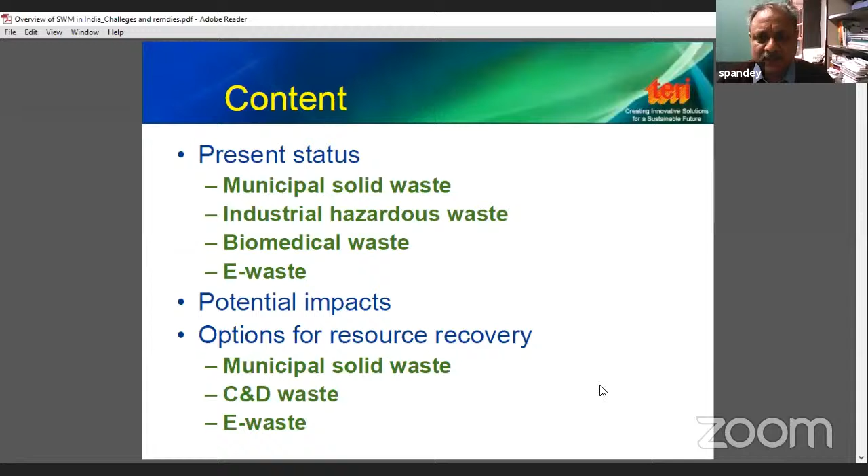If you look at the content, it briefly discusses municipal solid waste, industrial hazardous waste, biomedical waste, e-waste, one or two slides on the present status of generation, and potential impact if these waste types are not managed properly. Then some options for waste recovery and recycling, and towards the end, with reference to COVID, how waste has to be managed.

So, present status - a slide on generation in terms of waste quantities. Starting from municipal solid waste, almost every kind of waste is generated in terms of million tons per annum, except for biomedical waste, which is less, but not least important because of the type of hazard which biomedical waste, or waste generated from hospitals and healthcare facilities, possesses. Municipal solid waste is around 62 million tons per annum, as reported by regulatory agencies.

Construction and demolition waste - though regulatory agencies mention much lower generation, we estimate around 500 million tons per annum is generated. Construction and demolition waste mainly comprises construction activities like flyovers, roads, buildings, bridges, and also buildings broken up when they become old or are renovated, and roads and other infrastructure. So waste generated from that is called construction and demolition waste.

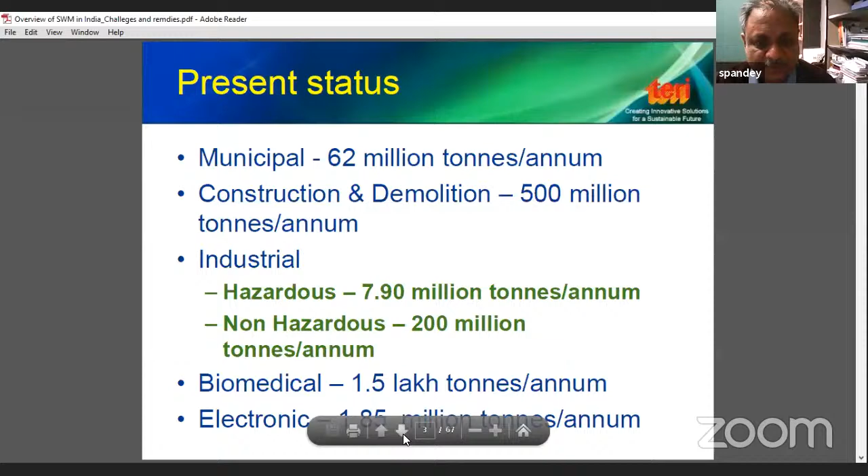Key issues - what are the key issues in terms of each of these waste streams? Why are we bothered about these waste streams? Municipal solid waste, as the name suggests, is generated from cities, municipal activities, households, institutional premises, and commercial premises which are there in the city.

What are the issues? We don't segregate waste still to the extent that we should be doing. Though, if you look at Swachh Bharat Sarvekshan, Swachh Bharat mission documents, around 50% of households are now segregating waste at the source, but still a lot more has to be done.

Inefficient collection efficiencies in most of the cities range from 50 to 90%. 90% is generally for larger cities, and 50% for smaller cities and medium towns. So that indicates that on a daily basis, not the entire waste generated is collected. Some waste remains uncollected on the streets, on the roads, and that creates a problem. It not only attracts stray animals, but also is a nuisance in the city.

Inadequate transportation facility in around 70% of cities - 70% of the cities still don't have proper transportation. Waste, except for large cities, is often transported open, and it keeps spilling everywhere while transporting. Larger cities have done better because of better finances, where the waste is transported covered, so there's very little chance of spillage.

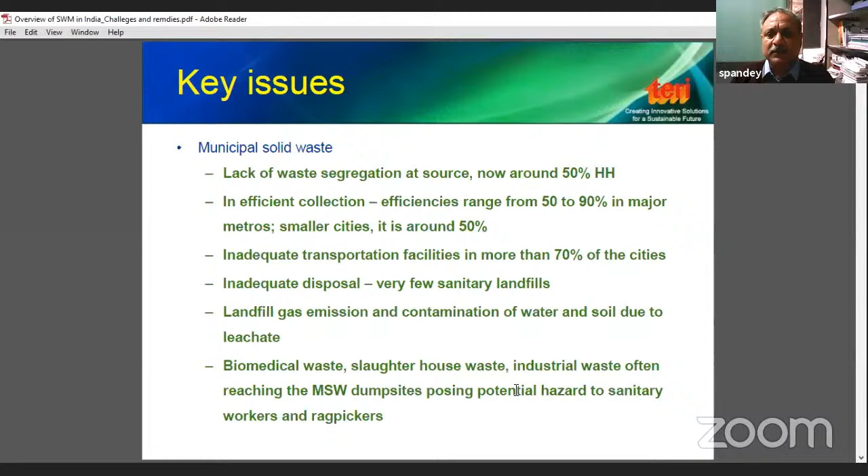Those who are not regulated, their waste also goes to municipal waste dump sites. Industrial waste often reaches municipal waste dump sites. When I say industrial waste, there are a lot of small industries in the city operating in small houses, small factory premises, and that also sometimes goes to the municipal waste dump sites. What this does is create a hazard to people working at the dump site, not only sanitary workers, but also waste pickers and rag pickers who are at the waste dump site picking up valuable material from the waste sites.

A related issue to municipal solid waste is land requirement, because much of the waste is still not segregated. So unsegregated waste still goes to the dumping site for disposal. The Central Pollution Control Board, in its report of 2012-13, had estimated what the land requirement would be.

So treating some waste ensures that landfill requirement reduces. But overall, if you look at landfill requirement for the next 20 years, it's a huge amount of land required, around 66,000 hectares. On an annual basis, around 1,240 hectares of land is required every year. This is a huge requirement of land, and no city is able to provide such kind of land for landfill disposal. So it's very important to maximize waste treatment and waste recovery, so that less and less waste goes for landfill disposal, and less land is required for it.

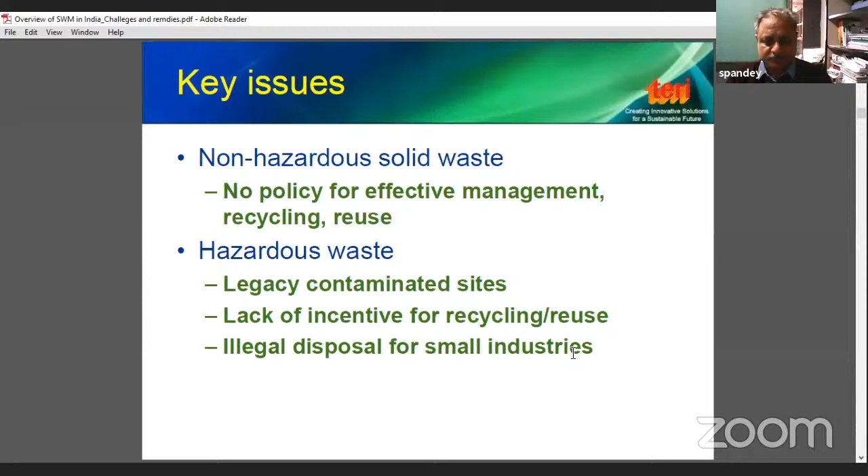On the other hand, many small industries are not equipped to handle their raw materials and chemicals in a proper manner. This creates a lot of contamination, pollution problems, and also a lot of waste which they generate.

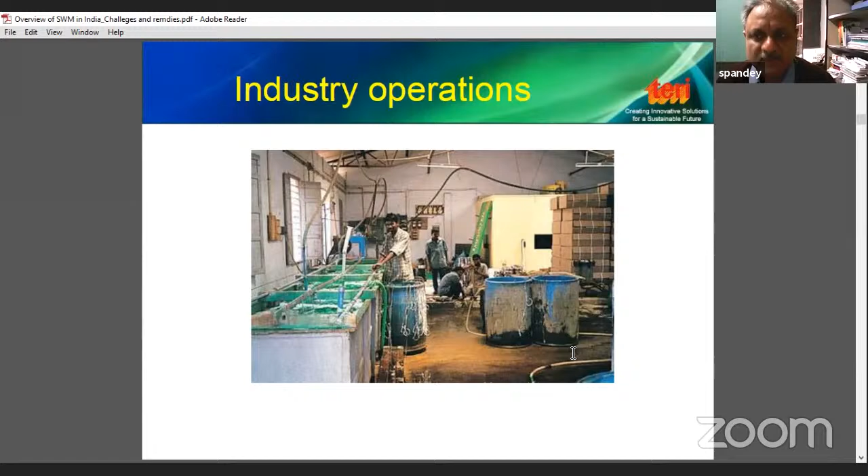A lot of acids are used in the process. The people working here don't have any personal protective equipment, and the place has a lot of acid fumes and spillage. You can already see a lot of spillage around. This kind of working environment is certainly not desirable and causes a lot of pollution, not only in the industry, but when this waste is disposed outside, as seen in this slide.

Here you see basically a drum containing waste oil, because industry uses a lot of machinery and equipment, and for lubrication a lot of oil is used. When this oil becomes waste, it's stored in drums. You can see these drums are not stored or stacked properly, causing a lot of pollution by leaking and spillage.

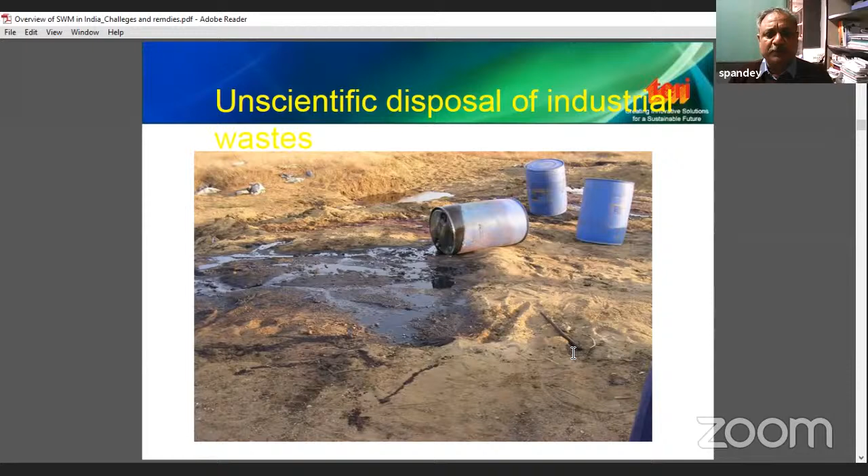Another problem is that small scale industries often do illegal disposal. This happens because if they dispose their waste at sites provided by the states, these sites charge money, and industries want to save money. So sometimes they illegally dispose waste at night along the roadside and then run away. You can see some of the waste being disposed on this road, on the roadside.

Now imagine what happens when the rain comes. Whatever is water soluble will get dissolved in the rain and run away with the rainwater, contaminating and polluting other sites. Also, whatever is not soluble will get washed away to nearby areas, causing pollution and nuisance there as well.

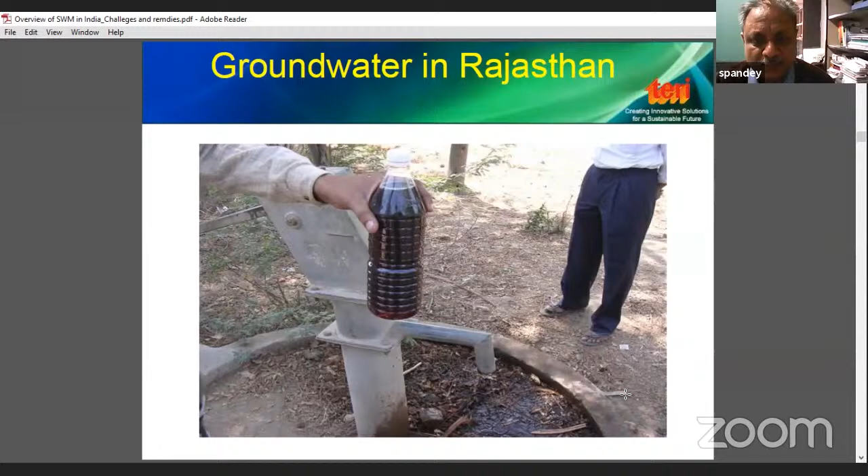Biomedical waste, what are the key issues? Unlike other waste, biomedical waste contains a lot of material which can cause injury and disease, since it's infectious waste. In healthcare facilities, we use a lot of syringes, surgery items, ampoules, glass bottles and so on. So if people are not careful in managing these, they can be at risk of injury, and not only injury but disease also, because of improperly treated waste.

In early days, sanitary workers or people working in biomedical waste facilities used to complain of hepatitis, as a result of exposure to infectious waste. That is why a high level of segregation and treatment is required for biomedical waste. But as I said earlier, waste is often mixed and seen dumped at the municipal waste dump site, which is sometimes a cause of concern.

E-waste, though, we have to a large extent addressed the first point, which is transboundary movement. A lot of e-waste movement used to happen from developed countries to developing countries. For example, e-waste generated in Europe, in countries like Japan and also the US, used to come to developing countries for recycling, because recycling was expensive in developed countries. So they used to find it convenient to send it to countries like India, China, Pakistan, Bangladesh, Vietnam for recycling.

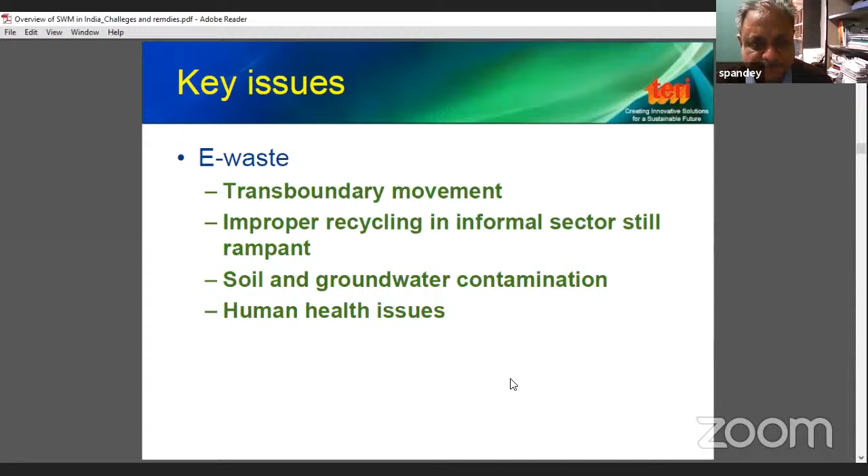Improper recycling, wherever it happens, is largely done in the informal sector, which causes soil and groundwater pollution and contamination. Also, people who are recycling, if they are not using proper personal protective equipment, get exposed to acid fumes and other toxic elements. Health issues are often reported from e-waste recycling facilities. As an example, I'll show you some slides taken from when e-waste recycling was happening in China.

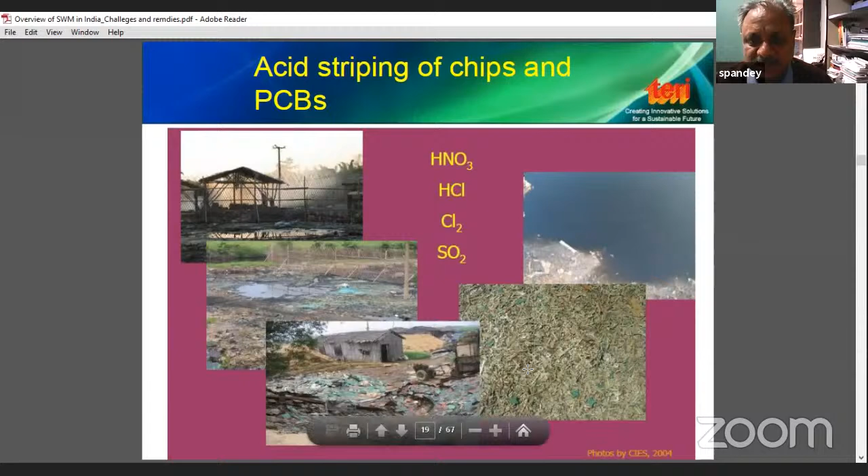This causes pollution, and if you keep discharging oil into water bodies, gradually all the flora and fauna die out, because oil doesn't allow any life to survive. Sunlight cannot penetrate the oil layer, and oil is pollution in itself.

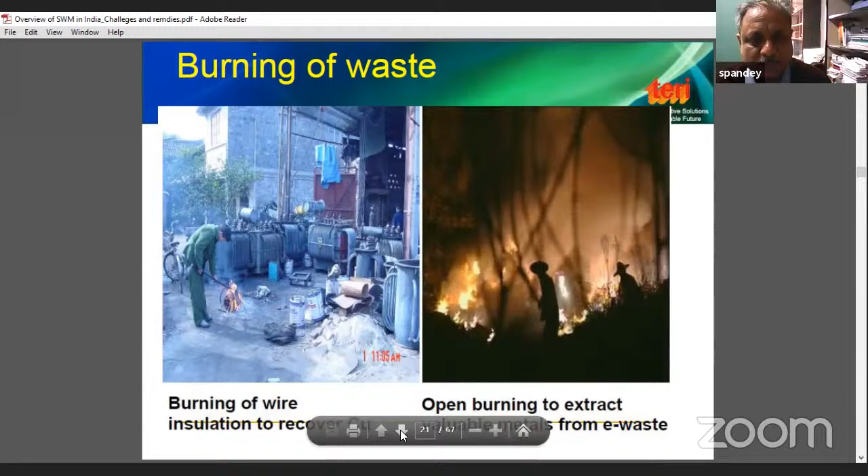Here are a few more photographs of burning of waste. I'll run through these quickly, as they are kind of self-explanatory. A person working burning wire cable to recover copper, and large-scale burning of e-waste again has the potential to cause air pollution and emit pollutants into the atmosphere.

Now, from the impact side, we'll move to opportunities in material recovery and recycling. I'll largely focus on municipal solid waste, because covering all the waste streams would not be possible in an hour. MSW can be segregated or unsegregated. In a lot of countries where land is a problem, sometimes they don't segregate the waste, and send everything for incineration, with the incineration residue then managed properly.

In countries where some segregation is happening, there are various pathways through which waste is processed. For example, organic waste can be composted or biodigested to produce biogas. Recyclables like glass, metals, paper, and plastics can be sent for recycling. Sometimes recyclables are too dirty to clean and send for recycling. Such materials which cannot be recycled are called dry organic material, for example mattresses, leather footwear, or rags and cloths which are too dirty.

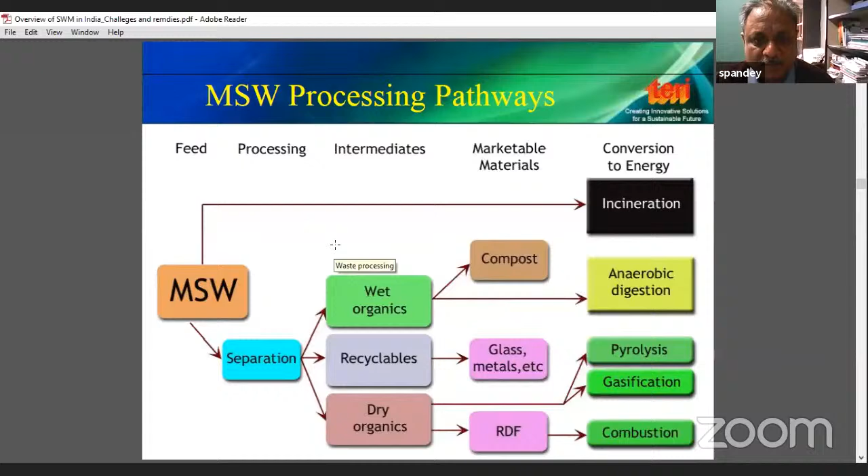These can go for a process called pyrolysis or gasification, where they produce pyrolysis oil or gas for further use as fuel, or can be processed and converted into RDF, which stands for refuse-derived fuel. This is fuel derived from processing waste of high calorific value, then combusted to recover energy or value from it.

Recycling is important because an international data source says recycling generates more jobs than simple dumping of waste. For the same amount of waste, dumping creates 6 jobs while recycling creates 36 jobs, around 6 times more. These jobs are also at a much higher income level than simple dumping. So that makes the case for why waste recycling, other than addressing the landfill disposal problem, is essential.

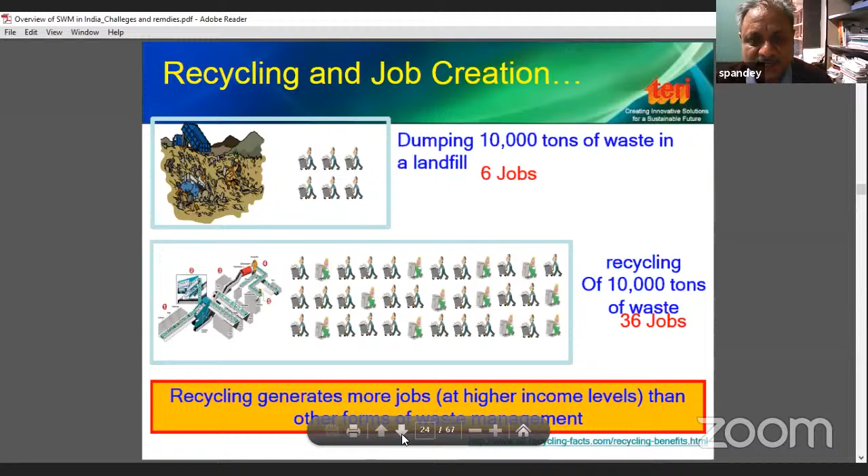They do a lot of PET bottle recycling. These PET bottles, when collected, are shredded and produced into threads, and from these threads you can produce various items like upholstery for cars and vehicles, sofa mattresses, hand gloves, toys, and large sheets for covering drains and farms in very cold countries. Interestingly, a lot of PET threads are now going into garment manufacturing. In fact, the Indian cricket team's Nike dress is also produced from recycled PET bottles.

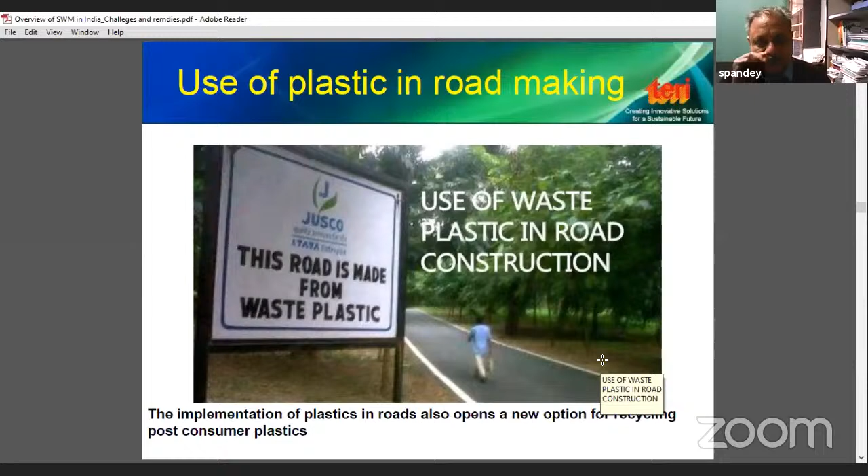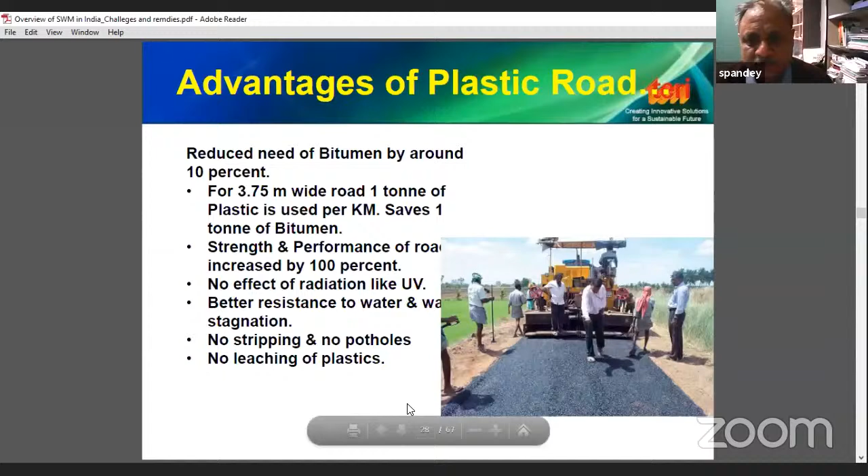No stripping, no potholes as a result, and no leaching of plastics. Another item problematic in waste management is thermocol products from packaging, the styrofoam we get as a container in food items. Though companies are now using less styrofoam and more easily recyclable material, a lot of styrofoam or thermocol still goes into packaging. For example, if you purchase large white goods like refrigerators or TV sets, they're still packed with thermocol to ensure they aren't broken during transportation.

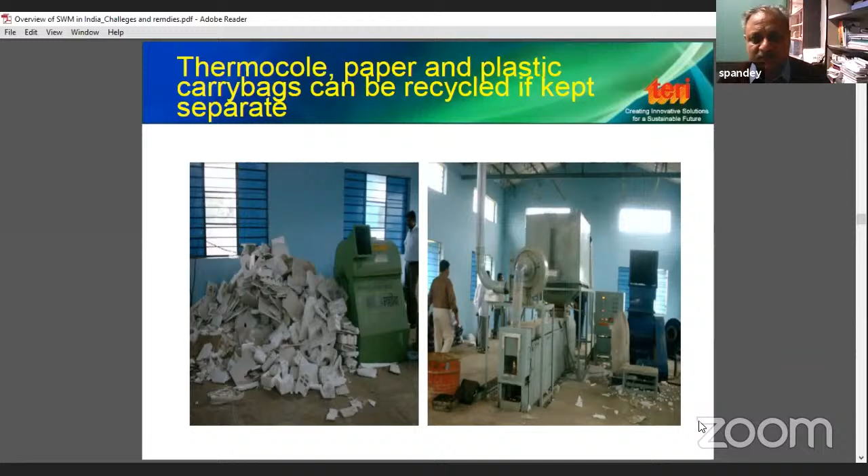So some municipalities, for example this photograph from Goa, have found a very innovative way of using these thermocol items. They crush it into smaller pieces, and after crushing, mix it with gypsum to make a board, an artificial ceiling material used in buildings.

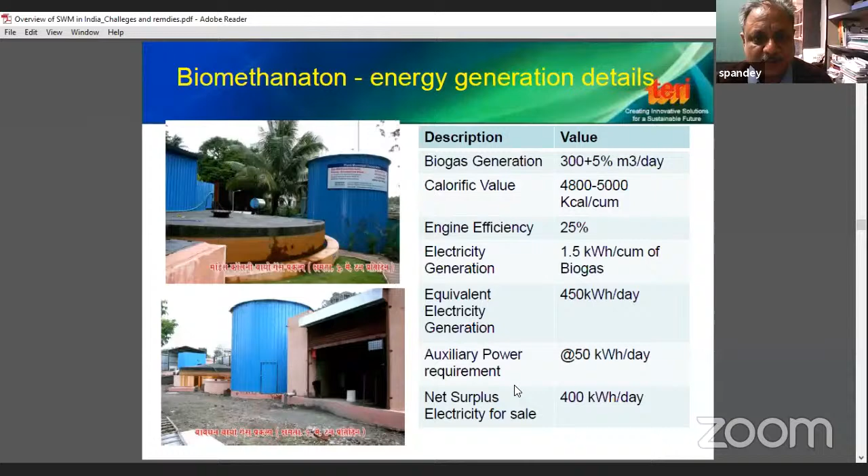This slide gives an example of anaerobic digestion, when waste is rich in easily degradable organic material. Then, other than composting, you can also do biogas generation. This is a plant which processes 5 tons per day in Maharashtra. You can look at these figures for how much energy is generated, around 450 kilowatt hour per day. Of that, around 50 kilowatt is used by the biogas plant itself, and 400 kilowatt hour is supplied to municipal authorities, who get paid for this energy generated.

Now a lot of interest is happening in the area of composting, because earlier composting used to be done in large land areas in the open. As cities develop, it's very difficult to find large land areas, and that has its own limitation. So people have started looking at whether composting can be done in a smaller, controlled environment, where humidity and temperature can be controlled, and the entire cycle done in a reactor, much like biogas digestion, but in an oxygen-rich environment.

This composting, though a little more expensive than doing it in the open, is now catching on with large housing societies, hotels and restaurants which have no use for biogas. They can install such a universal composter and produce compost out of food waste, since they continuously generate food waste. So this is a very attractive option for them.

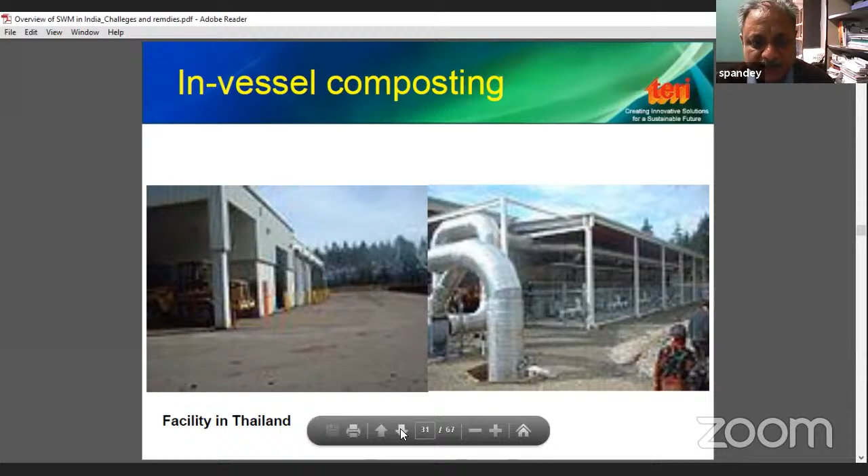This is called windrow composting, the composting done in open at a large scale. Why is it called windrow? Because if you see these rows or troughs, waste is piled in such a manner that air can pass through on both sides and circulate in the waste pile. This is necessary for aerobic composting, since the bacteria and microbes need enough oxygen to be available.

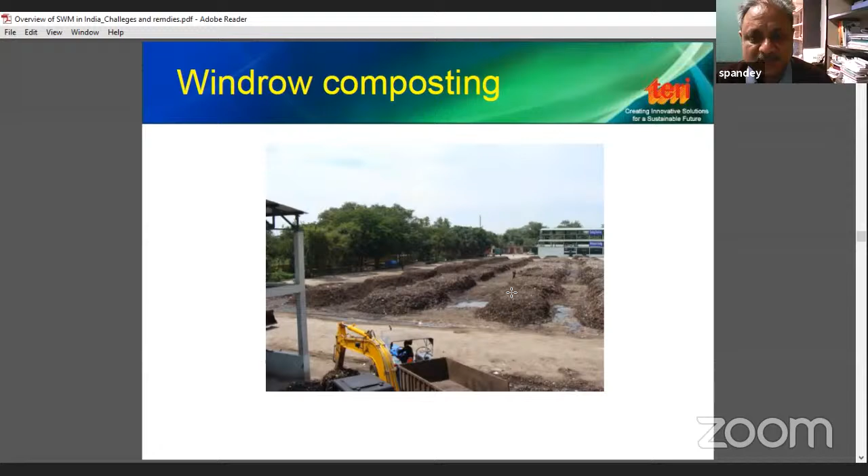One problem with such composting is that waste is most of the time composted unsegregated. This is a mature compost plant, where after composting, compost has been separated, but a lot of uncompostable material also has to be separated from the compost. As you see, these are mostly dirty plastic bags which cannot be recycled.

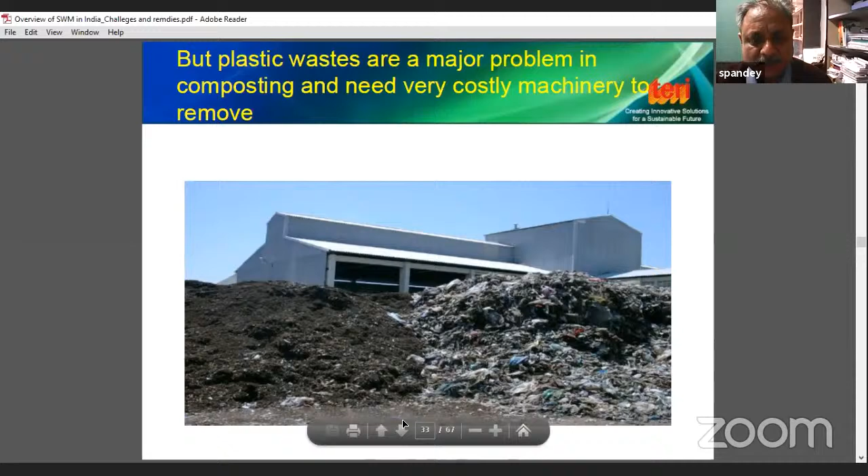So what is to be done with such waste generated at the composting plant? It can be collected and densified into what I mentioned earlier as refuse derived fuel. This compact fuel forms fuel pellets, and once you convert waste into these fuel pellets, the advantage is that it's much easier to handle - there's no odor, no other nuisance, and it's much easier to store and transport.

Now these can be like brick pellets, coal pellets, or wood pellets. They can be used for energy recovery, either for waste to energy or for other industries operating in that area.

These waste materials can also be fed to cement kilns. There's a big business opportunity happening in the cement sector, where cement is produced by burning coal, and this coal can be replaced partially by such alternate fuel—10%, 20%. In Europe, they've been able to replace around 50% of their fuel requirement with this alternate fuel.

So what happens in a cement kiln? It is advantageous to burn such waste in cement kilns because they operate at much higher temperature, around 1500 to 2000 degrees centigrade, which ensures complete destruction of pollutants, with high residence time since enough oxygen is needed in the combustion area. Residence time is typically more than 5 seconds, compared to incinerators, where it's generally around 2 to 3 seconds.

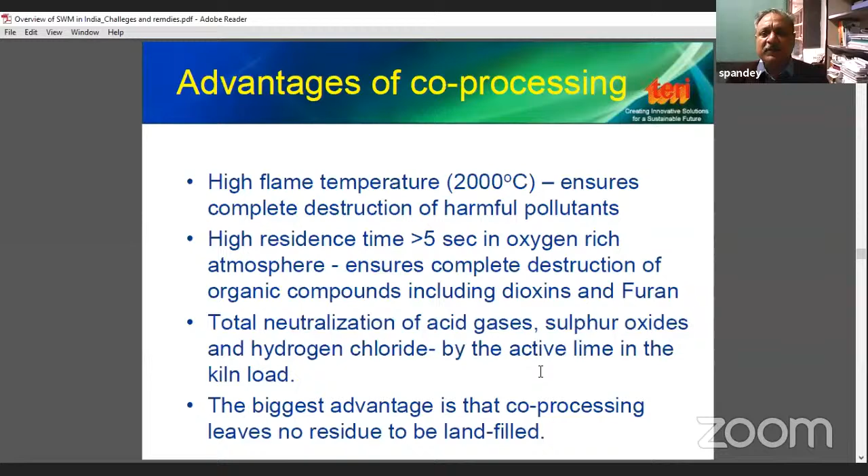If any sulfur dioxide or hydrogen chloride is generated, the cement process also uses lime, which neutralizes these acid gases. The residue from burning such alternate fuel becomes part of the cement matrix itself, so there's no need for landfilling. That's the advantage of using this fuel in a cement kiln.

This slide shows how construction and demolition debris has been recycled into very useful products—pavement blocks and kerbstones, which you're familiar with.

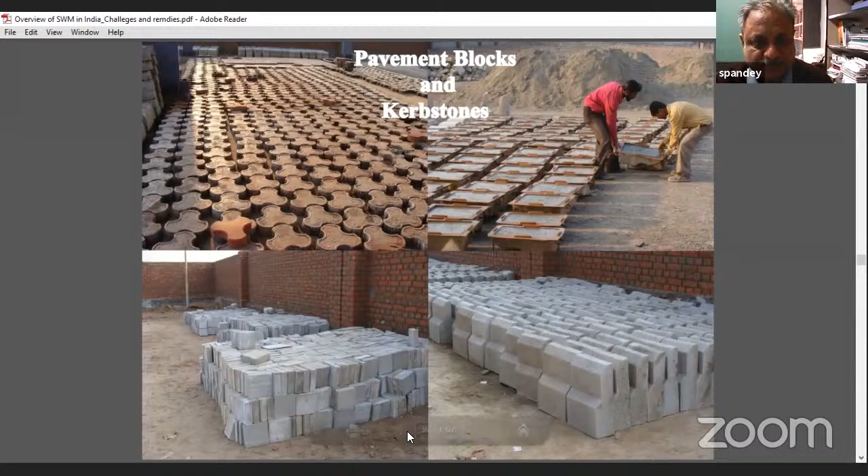Waste can also be gasified, as I said earlier. Combustible waste which has calorific value but is not degradable can be gasified, and the gas produced can be used as a fuel.

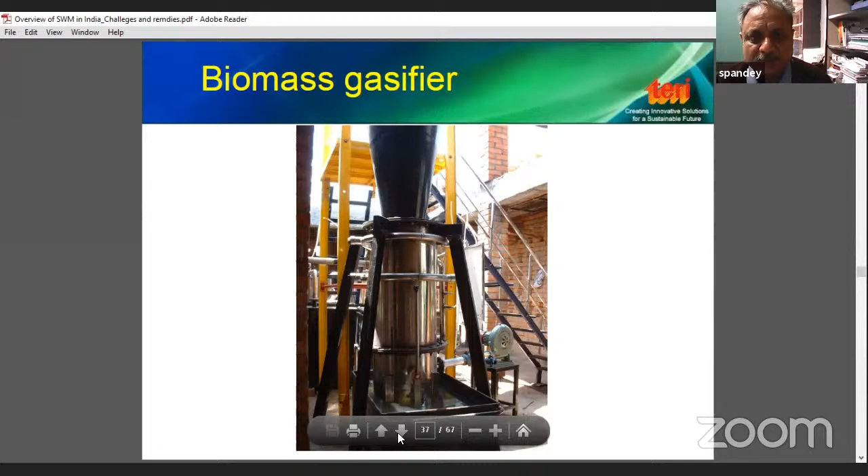Another concept is biorefinery, where waste is processed into different products. Since you're from a biotechnology and biochemistry background, waste has a lot of valuable material which can be derived through use of enzymes and certain reactions. This concept is catching up globally, where waste is now being used to produce different value-added chemicals.

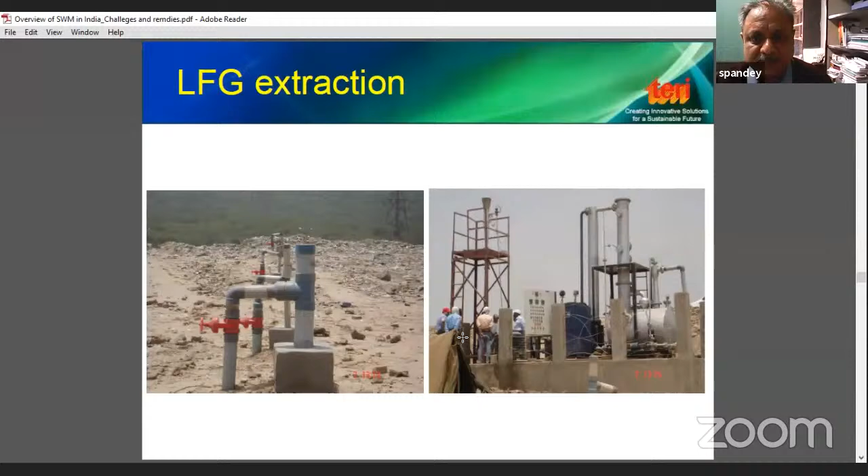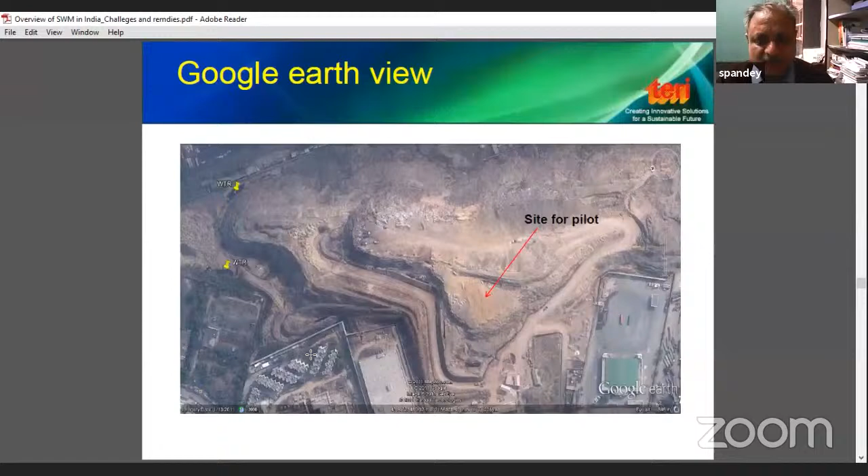This gas can be purified and used as a transport fuel by the bus terminal, or for steam purposes in the hospital. So there are enough users if the landfill gas can be harvested.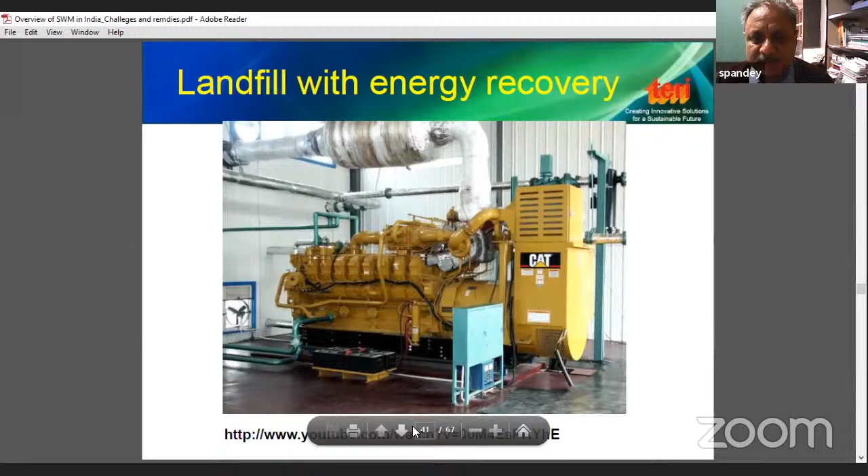Commercially, worldwide, there are a lot of technologies available. If sufficient landfill gas is there, commercial engines—like this one from Caterpillar—can burn this gas to produce power, which can be fed to the electricity grid.

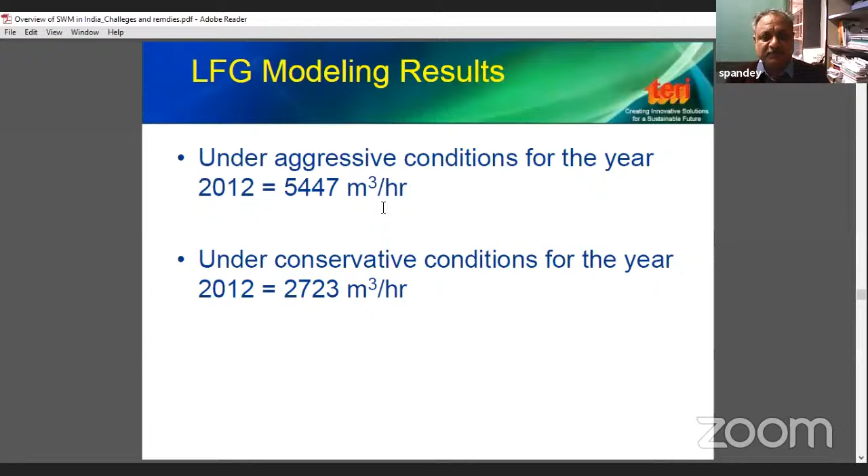These are results from our landfill gas estimation exercise. Under conservative conditions, around 2,700 cubic meters of this gas can be generated from this large landfill site in Delhi, which can be used if harvested properly.

Another concept catching up is landfill mining or biomining. Because of landfills that have existed for 20-25 years and become mountains of waste, the idea is to open the landfill and remove valuable material, using the inert soil-like material for construction applications. This is one upcoming technological solution catching on in the country.

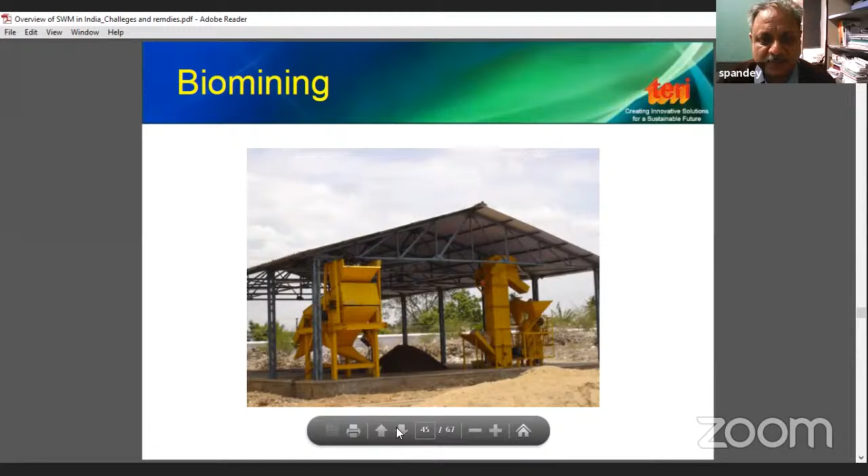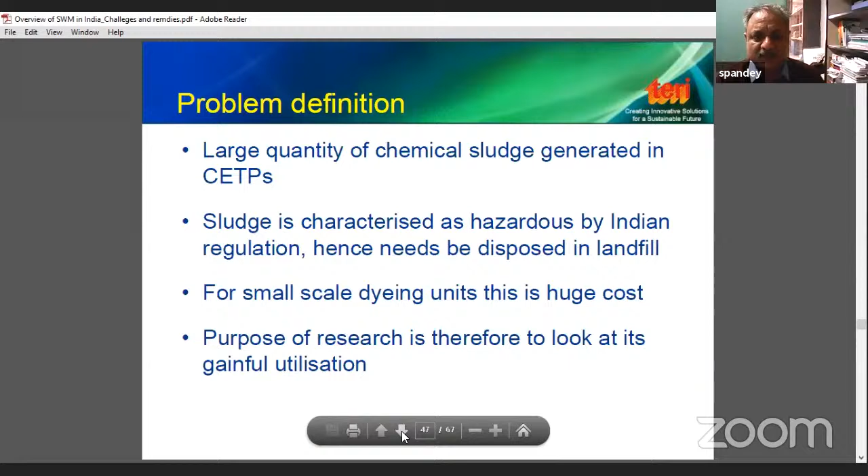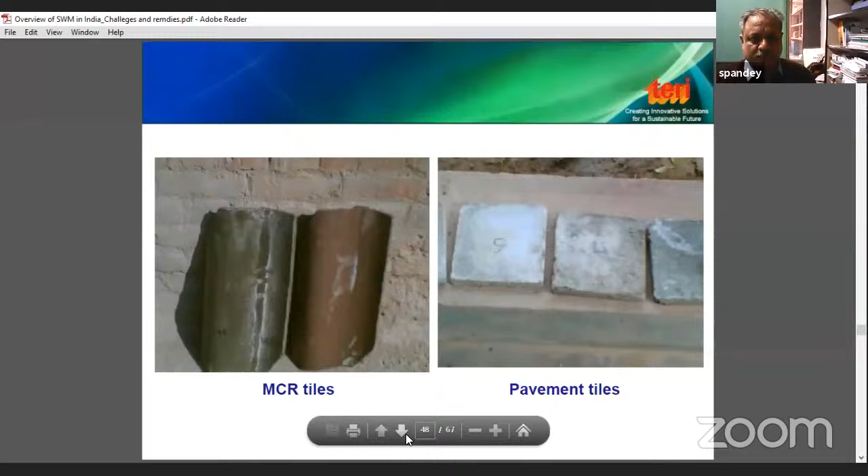Chemical sludge from the dyeing industry produces another challenge because it's hazardous waste. What can be done is produce tiles by mixing it with cement, limestone and sand, which can then be used for construction applications. This is a kind of saving—instead of disposing this waste, an entrepreneur can earn revenue from it against the cost of disposal.

Now I'll run you through some slides on decentralized composting and what initiatives some cities have taken.

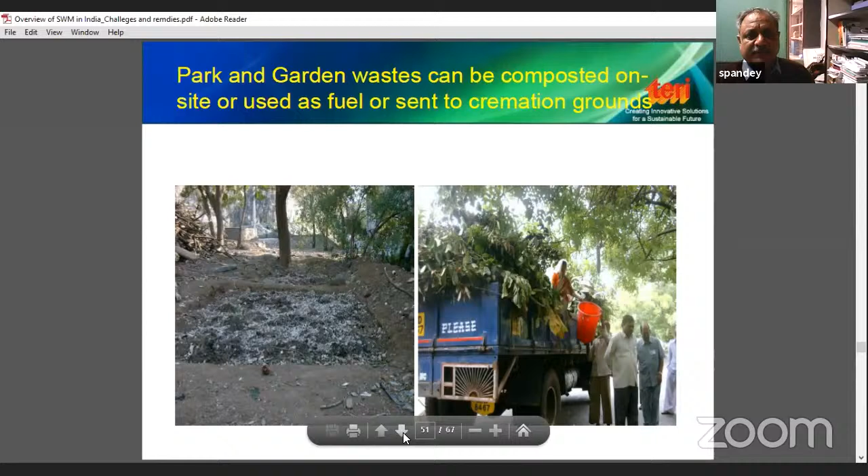This is pit composting in the garden. A lot of horticulture waste gets generated and pit composting is done. You can also do it in households where these kinds of composters are available. If there's space in independent houses that aren't multi-storied, the daily waste generated from houses can easily be composted.

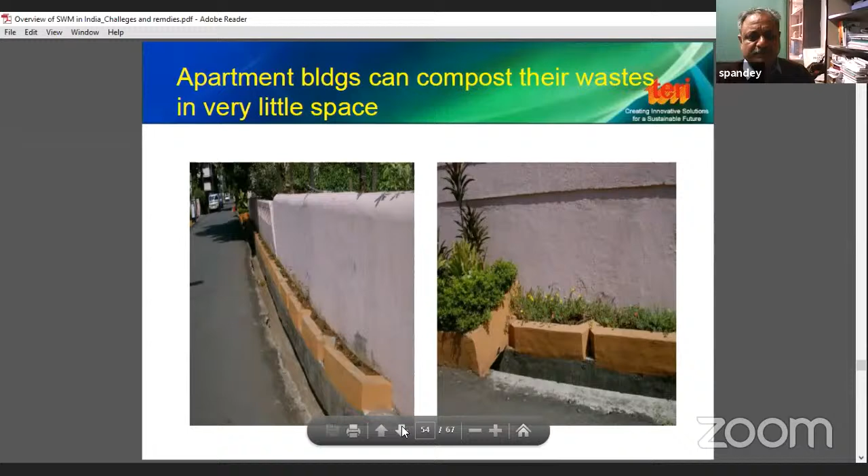Similar bin composting here, where composting can be done in the plant bin itself, and it can support the plants also. On the roadside, a few cities have tried this innovative way of composting.

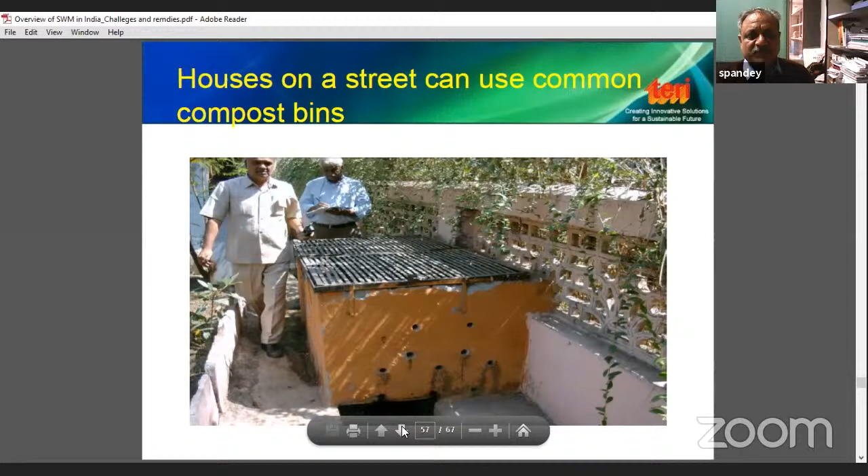On the drains, often they are open and create a problem of smell and odor. So this not only covers the drain but also composts the waste coming out in that area.

Larger composting at the community level, where larger pits are excavated and constructed, and composting is done at the community level. Composting done on the roadside also beautifies the area in the process.

Compost mixture can be prepared very economically with a lot of locally available material—cow dung, water, rock phosphate. If rock phosphate is not available, you can also add jaggery to produce low cost cultures.

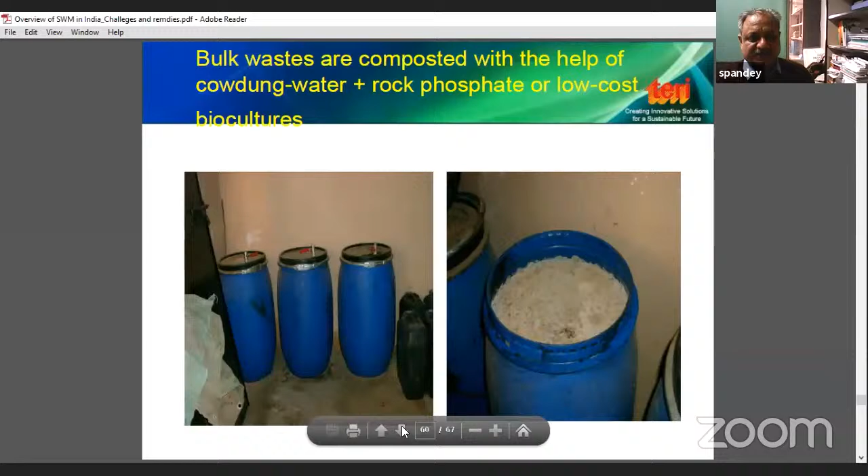Now an important issue—since we also wanted to discuss COVID, how waste management has been happening since last year, and what are the concerns with COVID. Now the cases have gone down much lesser, but in peak time, what was suggested globally...

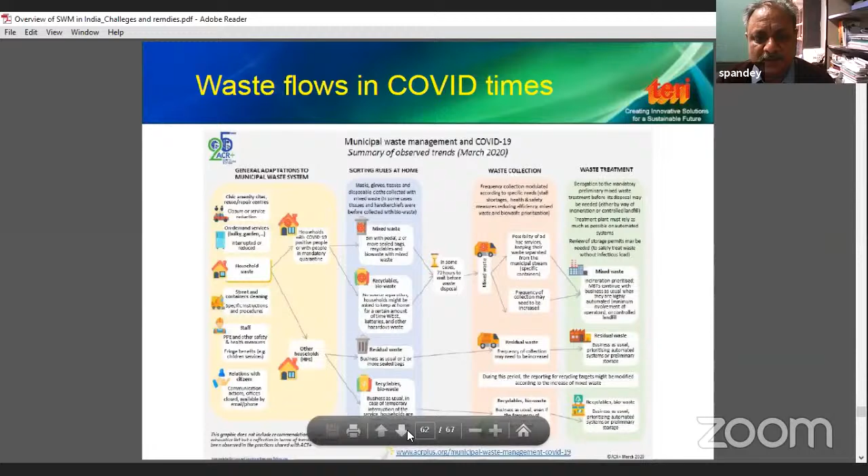In zones where households are safe and there's no COVID contamination, waste segregation should happen properly—green waste should go for composting, other waste for recycling, and inerts can go for disposal. So what was the recommendation of ISWA?

ISWA, the International Solid Waste Association, looks at policy issues globally on solid waste. They suggested there should not be any service disruption, including recycling, when COVID first came, because waste management is the most important aspect in maintaining human hygiene and health. So they said don't stop waste picking or collection, but modify it to a certain extent.

For example, discontinue manual handling—no human handling of waste to the extent possible. All handling should be automated, because of the COVID infection risk and chances of the virus infecting waste handlers.

Waste suspected of coming from COVID areas should be stored for at least 3 days before or after collection. Households generating such waste in COVID areas were advised to store it for 3 days before disposal, since the virus was seen to survive for 3 days on most surfaces before dying out. It survives longer on plastic packaging, so avoid plastic packaging where possible in COVID infected areas. Waste services were identified as essential services in many countries.